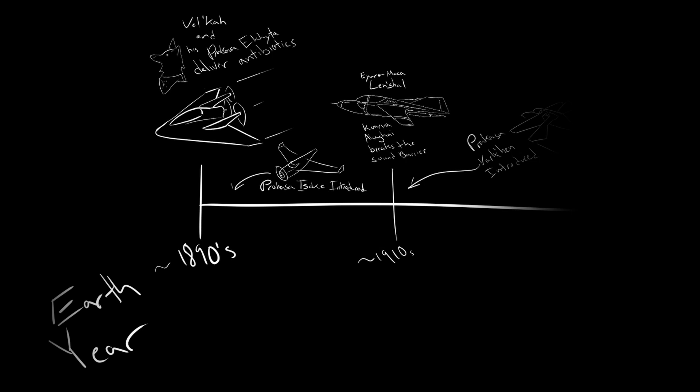Aside from school, Tenra had never made much of an effort to integrate me. I suppose he didn't feel it was his business, or maybe Mom had told him not to. Hell, maybe I told him not to. I don't remember. But for those first couple of years, it was like being raised back in the CCR, albeit by an awkward, bumbling alien parent, like the two of us were out of a Spielberg knockoff.

I didn't think much about him. Of course I didn't, I was 9. To me, he was a weird god trying to masquerade as the one I'd known. But something changed when I brought up the festival. I think I got to see the person Mom had liked so much. He cared for me until then, sort of like I was a very needy roommate who was scared of the dark. But it was then that he'd started to raise me. I think maybe it was the first time he felt he had something to offer.

You see, Uncle Tenra fell somewhere on the grand ethereal web that stretches between all of the galaxy's preeminent scientific luminaries and all of her bravest and most ingenious rednecks.

You wouldn't know it to look at him. He's bookish, and before me anyway, made a modest living working on high-pressure systems and space stations. Not glamorous work, but shockingly dangerous and sophisticated. He said it took him all over the settled galaxy, past the furthest reaches of the affiliate's borders. Said he'd worked, lived, and made friends everywhere from the glitzy commercial centers and Thika Zone rings to far-flung research stations where the only light comes from the ones you switch on.

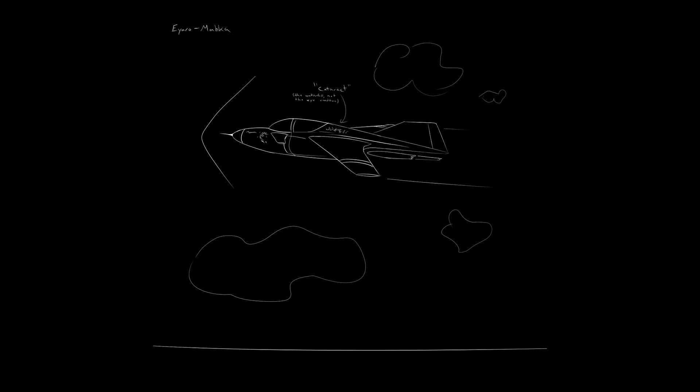Anyway, when fall came in my second year of school, I told Uncle Tenra that I wanted to try the Festival of Storms, and he lit up like someone dipped him in kerosene.

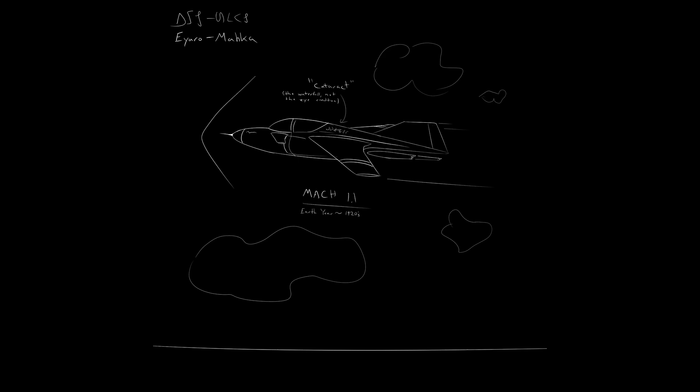It must have been late autumn when I asked about the festival, which I say because I came home from school to find the film of ice on the pond from that morning hadn't melted. Like always, Tenra was there to greet me with a bark and a mug of a sort of sweet beetroot mash that I was fond of.

Needy roommate or not, we had a rhythm. I felt safe with him. He knew what to say when I missed Mom, and I always liked the way he'd ask me about school. He had this casual bar-top parlance like we were equals.

Come to find out later that Laps are careful about each other's business, and it was only because of a book he'd read that Tenra had known to ask me at all. But the way he thought to do it meant a lot to me, and that day I answered very plainly, as children do: I wish we celebrated the Festival of Storms.

He looked confused. 'You do?' 'Santa can't get here anyway.' 'Who told you that?' 'Velky and I figured it. It doesn't make sense.'

I probably should have figured out Santa ages before then, but consider, I had a talking space fox for a foster father. Tenra shrugged. 'Your mom asked me to keep the Santa thing up until you asked, but there's more to it than him, isn't there?'

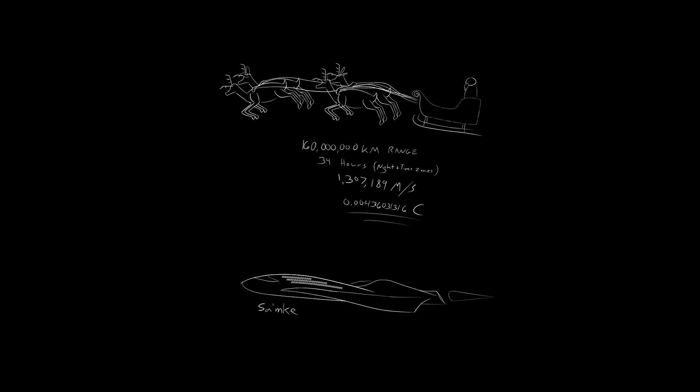'Is there?' I had some idea of who Jesus was, but I also had a point to make. His brow furrowed. 'Something about the belief your people were created and forgiven for something?' 'I don't know. It's a big deal, though.' It was my turn to shrug.

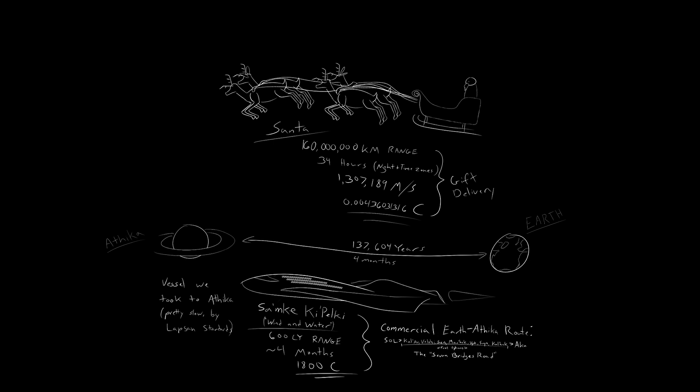'I don't know either.' He considered that for a moment, grooming his muzzle with a paw, and then he grinned. 'You're sure?' A steady twitch in his tail betrayed how badly he wanted me to say yes. Suffice to say, I had no idea what I was getting into.

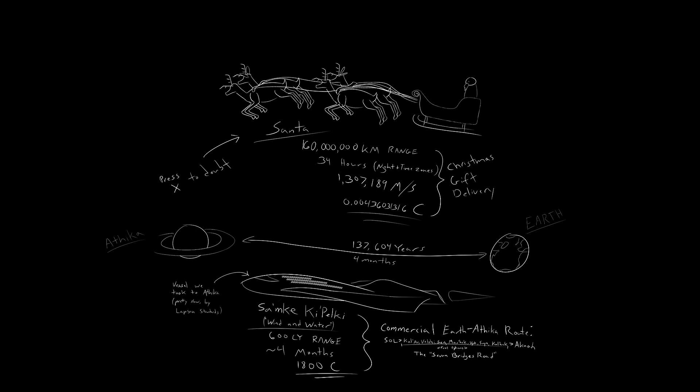You see, I thought the race was something you watched - purview only of the elite pilots and engineers who made household names of themselves. I thought the Festival of Storms that Tenra and I would celebrate would be the potluck thing. I thought that was what I wanted.

It made for a confusing ride to the airstrip, especially when this festival, as far as I knew, was still the better part of a month off.

Tenra called his machine Karaharshi, a word that meant the sound of your blood thrumming in your ears when your heart is pounding. I could neither write nor pronounce Karaharshi, and learning its meaning came to call it heartthrob. At the time I didn't know that term wasn't as literal as its Kinnery equivalent, but I've come to think it's suitable anyway. Sue me.

I introduced Karaharshi by its name because even now I struggle to find other words to describe it. If biblically accurate angels were a mess of eyes, wings, and whirling discs, then Karaharshi must have been a biblically accurate airplane. Even by Lapsan standards, it's tough to put it in clearer terms than that. I'll describe how it works, and you'll understand then, but for a quick simile, as a way to show you that thing my kid self saw, that's the best I can get you.

And if you'd been there, you'd understand why I believed in Santa for so long. If that flew, why not reindeer?

But the Karaharshi I met that year wasn't flying. Not yet. It loomed like an obelisk in the back corner of a tall but otherwise unassuming hangar on the northern end of the Karviken aerodrome. Its fuselage, then bare metal, shone gold in the amber of an old bulb that hung from the ceiling. The rotors cast long, twisted shadows, at least until Tenra snapped a switch on the floor and bright shop lights buzzed to life to banish them.

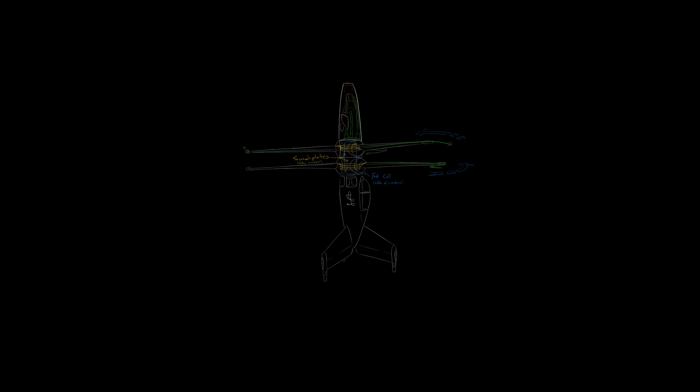Well, Karaharshi, aside from being the passion project over which an alien HVAC specialist bonded with his adopted human daughter, is the Pitts Special of thrustwings. Built for racing and aerobatics, it's a coaxial design driven by cold tip-jet nozzles mounted on the rotors and supplied by bleed air from a single central turbine, much like the rotodyne or jet gyrodyne concepts on Earth, or any other tip-jet helicopter that pleases you.

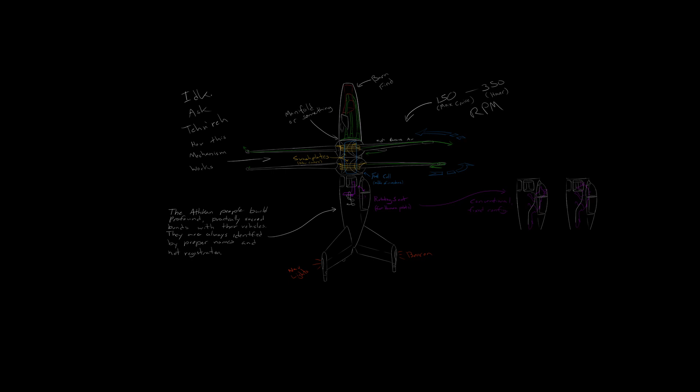It's fast, for a thrustwing anyway, and manages to have just enough range to be useful. But the headliner? Karaharshi is equipped with a cyclic. Having cyclic control, that is, control over the incidence of each blade individually while the rotor rotates, means two things. One, Karaharshi in VTOL mode isn't just a passively stable tailsitter, but a fully functional helicopter.

And two, it can do this. As a result, Karaharshi is, despite appearances, not only the most fun of my thrustwings and the most extreme in capability, but also the only one not to be a complete death trap. It's in fact so not a complete death trap that I think I could actually work up the courage to fly it if it existed.

But all of that begs a more fundamental question. What the hell is a thrustwing?

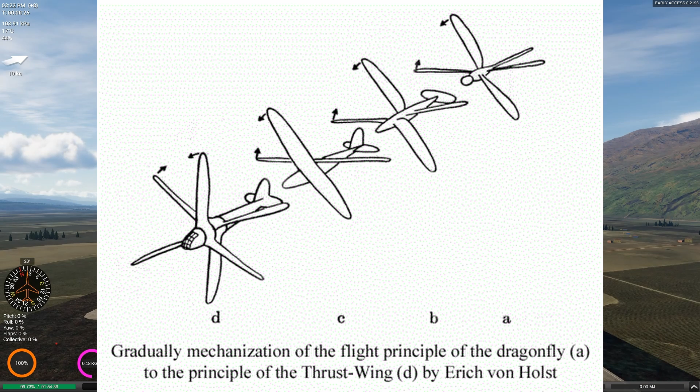Well, in the last video I did on the subject, I called them, quote, 'hybrid rotor aircraft,' not realizing that they kind of sort of have a proper name, coined by one Erich von Holst, a German physiologist who tinkered with ornithopters, and, at least on our planet, seems to be responsible for introducing the thrustwing concept sometime in 1940.

And in a way, thrustwings are a sort of ornithopter. As the name implies, they're aircraft that derive both their lift and their thrust from their main wings, just as birds, insects, or mechanical ornithopters in real life, Flyout, and even the funny worm movie do. The difference is, thrustwings accomplish this with more conventional axially rotating rotors rather than reciprocating wings. Effectively, they're helicopters, just with enough blade area to use their blades as a mix of wing and highly pitched propeller in forward flight. Why do this?

Couple of reasons. If it's 1940, the advantage is that you don't have the material science or jet technology to do VTOL the usual way, and this trick seems about as good as the rest of the wacky ideas for VTOL that people are coming up with. But if it isn't 1940, there are still some reasons.

And the first one is still VTOL. Sure, you could build something like a Harrier or an Osprey, but that means getting your propulsion system to give you a thrust-to-weight ratio of at least 1.0 and change, and that is not trivial. And after that, you also need a way of converting your vertically optimized propulsion into forward flight optimized propulsion, which probably also needs to be optimized for a much higher speed. And that is not trivial either.

Not that I would suggest thrustwings as a trivial alternative, they are absolutely not trivial, but depending on what you have to work with, I can see some value.

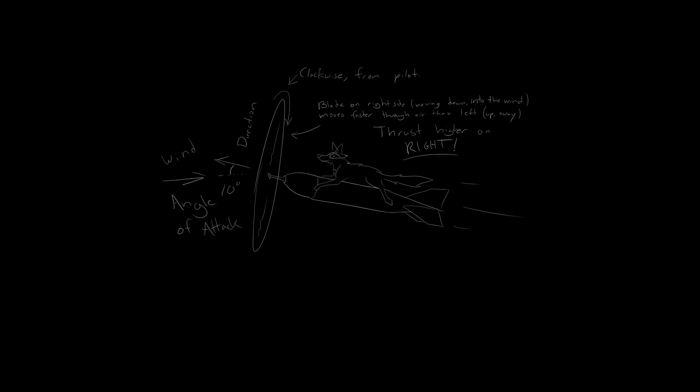After all, you can't have retreating blade stall if there is no retreating blade. That's even nominally true of the asymmetric lift problem, though the big asterisk on that is that it will only be true at angles of attack that are close to zero. Asymmetric thrust from propellers due to a blade that's moving overall more upwind than the other is absolutely a thing, and in fixed wing we call it P-factor. That is totally going to be involved, and we will be coming back to it later.

But for now, point is we've solved most of our rotorcraft problems by just pivoting our helicopter over until we use the rotor entirely for propulsion, and just like that, we have reinvented the tail sitter. Now, there's still that matter of torque versus RPM, but from there you can imagine what would happen if you just kept increasing the collective on that rotor.

Sure, you're kind of limited in the RPM department, but if you just keep increasing the blade pitch, the rotor can keep doing work on the air even at those low RPMs, and make as much use of the torque you have as possible. But we're not out of the woods yet.

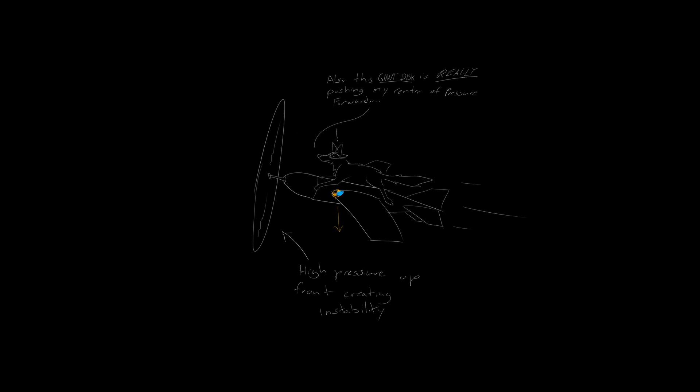Now that the rotor's busy facing forward all the time, we need some other way to support our aircraft, and that means wings. Adding wings means adding drag, and we've already got an awful lot of that from our rotor. Not that this sort of arrangement can't be made to work.

The XFY-1 Pogo is a clear example of it in real life. But what if you could arrange to use the blades themselves for lift instead? There are drag and weight advantages there if you can get away with it. As with ornithopters, if your source of lift is also your source of thrust, then you don't have to waste any additional drag on adding one or the other. And in theory, we can have a pretty big rotor without it becoming a burden in forward flight.

And now we arrive at the centrally driven thrust wing, a concept resembling Holst's early models. Unfortunately, as much as I would love to experiment with centrally driven designs, Flyout just doesn't offer us a good way of doing it. We can't drive these passive spindles with engines.

But on the flip side, tipjet designs have advantages all their own. The obvious one, of course, is that they have no express need for an anti-torque mechanism or coaxial rotor. But there's another, and that is that they aren't committed to making the same RPM for torque exchange that a helicopter or centrally driven thrust wing would.

This might be a little confusing since we're working with jet nozzles and not a drive gear like on a helicopter, but our tipjet thrust wing trades the linear speed of its jet nozzles for torque much the same way a small drive gear trades RPM for torque.

Our rotors produce incredible static thrust, but like the lower gear in a car, that thrust falls off very quickly as we speed up. We can help with that by increasing the pitch of the rotor as we discussed, but tipjet thrust wings offer a further optimization. Our tipjets produce relatively little thrust overall, but that thrust that they do produce falls off far less quickly with speed than our rotors.

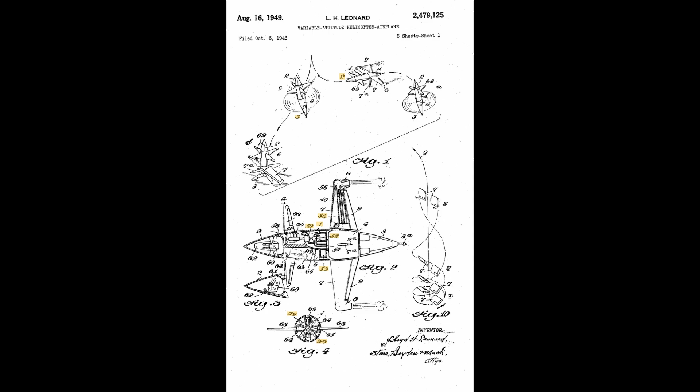A Lloyd H. Leonard. I just discovered this guy's patents courtesy of another Flyout friend and a forum post on the Secret Projects forum from like 2005. I have never seen this stuff before, but I am so glad to have found it. It should be keeping me pretty busy in the Flyout department for the foreseeable future.

Who is Lloyd H. Leonard? Is he in any way credible? Who knows? The patents are fanciful, to say the least, but I like my aerospace spicy. And it's not like it's any more fanciful than the German versions.

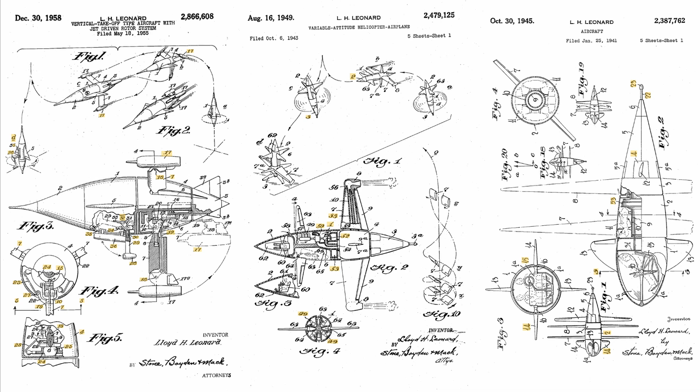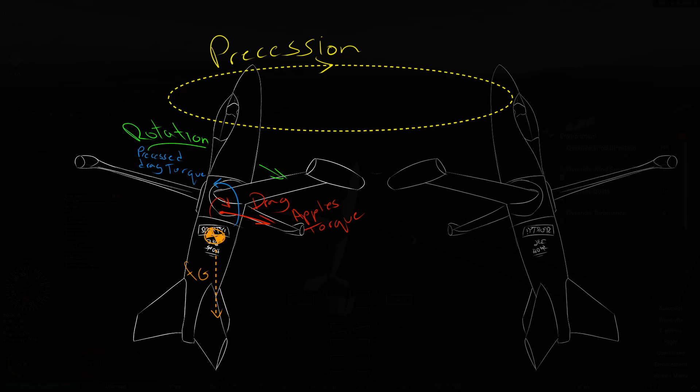But through all that, there's one thing that really stands out to me about Leonard's thrustwing. It's a canard design. Later in this video, I get really deep into the nitty-gritty of what makes thrustwings stable in vertical flight, as I now have a pretty solid theory as to why. For now, the short version is that the tailplanes are very important. But while I'm making that argument, I come to the conclusion that canards might be even better, due to the unique way that thrustwings precess.

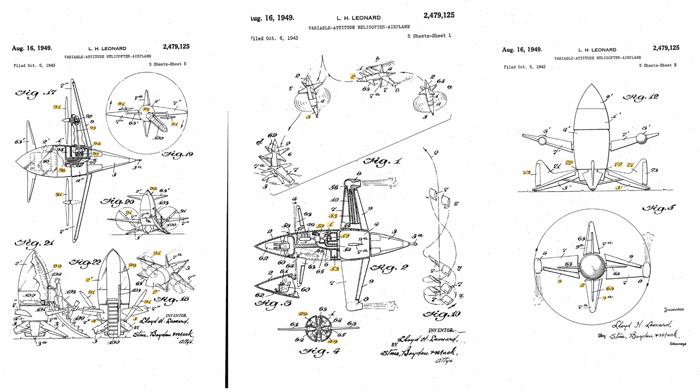I really wish I could speak with more authority on who Leonard was and where he might have gotten this information from. The designs, while fanciful, do show familiarity with aircraft. But as close as I can tell, filing patents for crazy designs seems to have been kind of a hobby for him - perhaps the closest one could get to Flyout in 1943, if not possessed of the resources to build your wacky designs for real. Other than the patents themselves and a few candidates for what might be his obituary - it's not a common name, but not uncommon either - that's all there seems to be on the internet when it comes to him.

More on this theory of mine in about a half hour. Sorry for the interjection, but there's a lot to cover here.

Somewhere out there is probably a model airplane builder who's got bit by the same bug that I was, so I wouldn't be surprised to learn that there were flying examples at the model scale. That said, I haven't found them myself. I am considering busting out my old Spektrum transmitter and taking a stab at it, though.

Thrustwings, as I mentioned in the last video on the subject and will yet be harping on in this one, have some really odd stability behavior - or at least Flyout seems to think that they do. I'm very curious to find out whether the predictions Flyout is making are realistic, because so far all of my attempts to understand and optimize for them have been based on the assumption that they have some basis in reality. If they don't, then solving the problem of thrustwings in Flyout abruptly stops being a matter of aerospace engineering and becomes a problem of software engineering - sort of like the aerodynamic equivalent of speedrunning Mario 64. Now, I find that stuff fun in its own right, but it's largely not what I come to Flyout for.

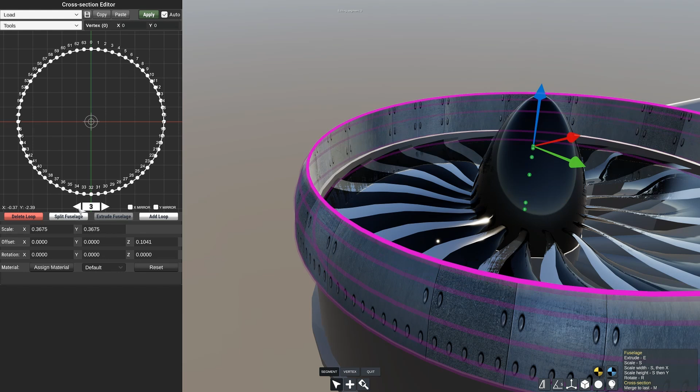Now, you could get around this limitation by constructing your wing from a multitude of smaller wings, but we would prefer to avoid that. The reason is, using multiple small wings will interfere with the span simulation that Flyout natively supports. As far as Flyout is concerned, your blades would then be many very small wings with very low aspect ratio, instead of one long wing with a relatively high aspect ratio, and that will result in an induced drag calculation that is higher than it should be.

Aside from that, for all its strengths, Flyout is still a simulator. It has to run the numbers on these wings on your computer, and it only has a certain number of frames to get that done. It's pretty good at that, but the more we complicate our rotor, the less reliable the whole assembly will be. I prefer to keep things simple. Thrust wings are tough enough to get flying as is.

But coming back to twist, the speed of the blade tip is, of course, for a given RPM, a function of the blade length. And that means that the longer our wing, the bigger the difference in speed from root to tip will be, and the more twist we will need to produce thrust evenly. That means the longer our blades, the less we'll be able to twist them as much as we should, and the worse they'll perform. Not only will they produce thrust less efficiently and be less resistant to stalling, but they also tend to be less stable overall.

Because of this limitation, for most sizes of thrust wing, you are going to want as much wing twist as possible. That's what I do here: -10 to +10, remembering to rotate the blade again to compensate so that the leading edge of the root is still facing straight down the length of the aircraft, while the blade is in its default, fully feathered position.

When you're happy with your blade, mount whatever you intend to use for thrust to the blade tip. You will want this source of thrust to line up with the leading edge at the tip of the wing, so it will be 10 degrees offset from the wing rotation, and thus 20 degrees offset from the wing root.

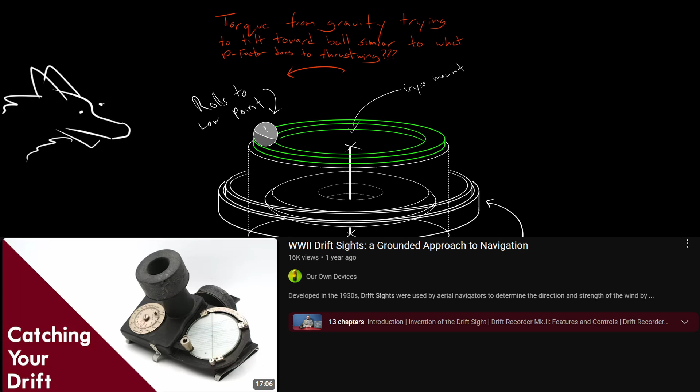If you want the background, watch this excellent video by Our Own Devices, which is probably my favorite channel on YouTube right now. But the short version, let's not worry about what a B-3 drift sight is or does.

The important part is that it has a gyroscope in it, and that gyro always points towards the ground, even if disturbed. It accomplishes this with a little metal ball set in a run on top of the gyro housing. This ball rolls to the low point of the gyro's current orientation under gravity, and gravity acting on the ball applies a torque to the gyro. That torque is then precessed by the rotation of the gyro, and somehow this process results in the gyroscope slowly spiraling to upright.

Our thrust wing seems to also slowly spiral to upright, and it seems to do it because of a constant torque from p-factor that doesn't care about the rotor's current orientation. Could it be the same thing?

To answer that question, we would need to understand how the B-3 mechanism worked. And I have no idea. I don't know, my friend doesn't know. Trying to research the thing, you'd swear that style of erecting mechanism was some kind of secret alien technology not meant for public knowledge.

We've clearly been using it in production since the 40s, but the only traces I've found of it existing are: A, the gyroscope theory and applications by James B. Scarborough, 1958; B, two patents in the US from the mid-70s; and C, an archived article from the U.S. Naval Institute magazine by one Ensign R.E. Gilmore, U.S. Navy, 1912. None of these sources describe how the device works.

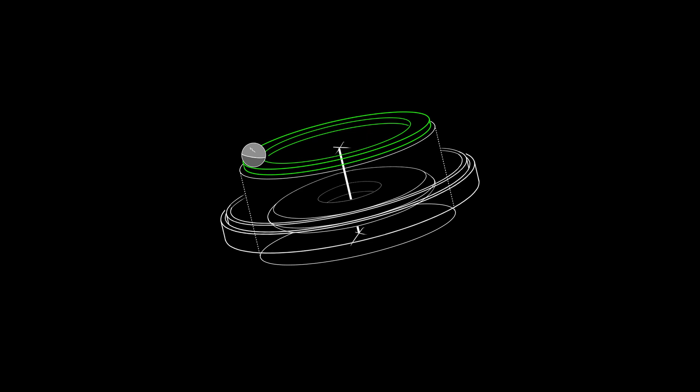Just to defend that conclusion a little: it wouldn't be enough for the device to just tip towards the ball and precess. It should precess infinitely in that case. The force of gravity on the ball would just turn 90 degrees, end of story. The ball must sit slightly ahead or slightly behind that low point if it wants to apply any force perpendicular to precession.

So maybe it sits behind? In the B3 mechanism, there's this little friction arm that seems to retain the ball. So maybe it holds the ball behind the low point, and that's where we get the force. But no, it can't be. The direction of that force, when precessed, would be wrong. It would face away from the device, not toward the center.

The only way it could make sense, at least as far as we could figure, is if the friction arm held the ball ahead of the low point rather than holding it a little behind. But friction and gravity alone couldn't explain why the ball would stay ahead of the precession. We figure that's what's happening, but there must be something extra going on with that little friction arm that we can't see.

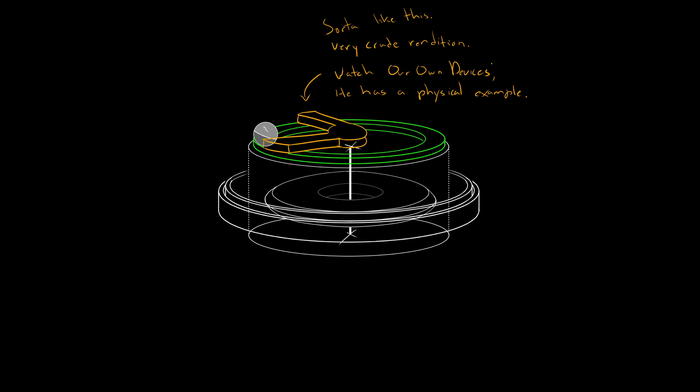I found it. After all this time, I found it. It was hiding in another patent. March 3rd, 1970, filed by the Whittaker Corporation in 1966. Patent US 3498146 alpha.

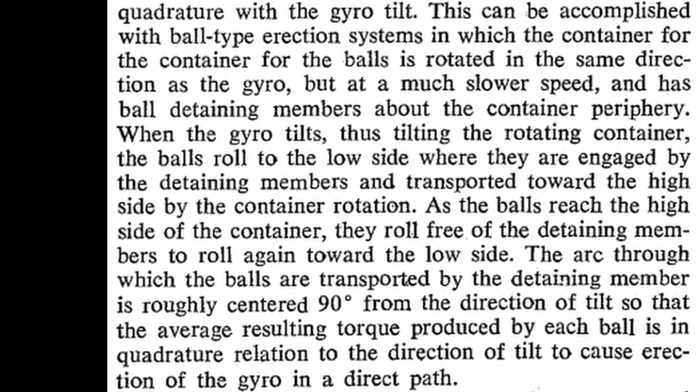Quote: this can be accomplished with ball-type erection systems in which the container for the balls is rotated in the same direction as the gyro, but at a much slower speed, and has ball-detaining members about the container periphery. When the gyro tilts, thus tilting the rotating container, the balls roll to the low side where they are engaged by the detaining members and transported toward the high side by the container rotation. As the balls reach the high side of the container, they roll free from the detaining members and roll again towards the low side. The arc through which the balls are transported by the detaining member is roughly centered 90 degrees from the direction of tilt, so that the average resulting torque produced by each ball is in quadrature relation to the direction of tilt, to cause the erection of the gyro in a direct path.

Wow, that actually genuinely makes sense. I have been looking for this information for months. This isn't exactly what's going on with the B3, since the B3 has only one ball and one apparent detaining member, but it seems to be entirely the same process, so I am satisfied.

Okay, cool, we understand. So then the question is: is thrust wing stability related to this behavior?

If you squint. To summarize my understanding of this system, let's assume our gyroscope is turning clockwise and rotated, say, 20 degrees to the left. The balls will roll to the left side and be engaged by teeth on the outside of the drum, then dragged forward and lifted up in a clockwise motion until they roll free again. Accelerating the balls that way creates a torque that attempts to rotate the whole assembly forward, but precession from the gyroscope causes the force to be applied to the right instead, which is the direction we need to go. So how does that compare with P-factor?

Let's assume our thrust wing's rotor is also turning clockwise and the aircraft is also tilted about 20 degrees to the left. Now the rotor in the dorsal position is experiencing more airspeed than the one in the ventral position, and producing more lift as a result. This would ordinarily torque us forward in pitch, but instead the force is precessed, and it torques us back to the right, which would in theory stabilize us.

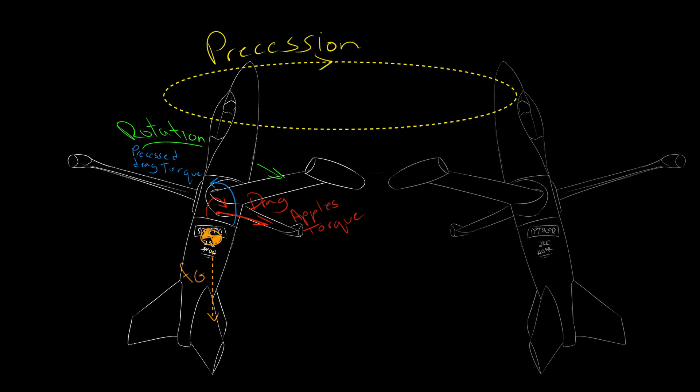Okay, cool. But now we have an even bigger question. If we need the hovering thrust wing to be dynamically unstable in order for it to become erect, why did removing the tailplanes hurt the stability rather than help? The difference is plain to see, but shouldn't adding the tailplanes push the center of pressure further back and make the aircraft more stable? And, yeah, good question.

I wish I had a better answer than I do. My guess is it has something to do with how far the center of pressure moves as the thrust wing slows down in vertical flight. The slower it gets, the less effective the tailplanes are, but the rotor remains unstalled because it's rotating, and provides pretty consistent pressure regardless of the thrust wing's speed.

Past that, in order for the whole stabilizing-like-a-top thing to happen, we need the drag somewhere with a lot of arm. I think that's what the tailplanes do for us, and why removing them ruined the effect. But if I'm right about all of that, are you thinking what I'm thinking? A canard pusher thrust wing should give us the best of both worlds.

Full disclosure, this is a very brief clip representing about 45 minutes of investigation. During that time, I tried doing a full canard pusher build like I was suggesting, pushing the rotor all the way to the back and relying on front-mounted canards for maneuvering. That is interesting from a hover stability perspective.

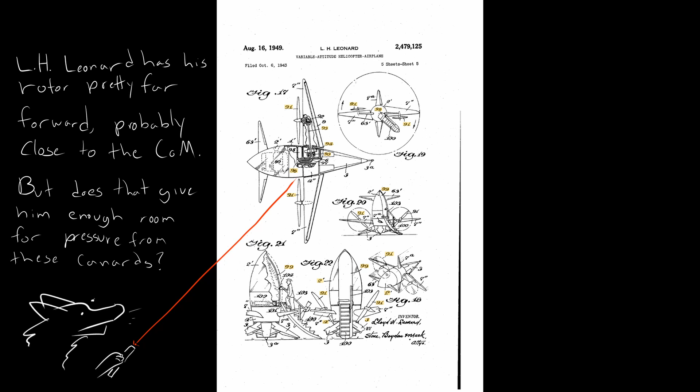It doesn't seem to always work, but there are some conditions where it works better. The big problem is it requires the rotor to be somewhat distant from the center of mass, because pushing the controls forward pushes the center of pressure forward. There is so much P-factor on the rotor that you really can't afford to have it very distant from the fulcrum, and that creates a ton of issues during pitchover. So if that can be made to work, it's not a problem for this video. So far, it definitely seems like thrust wings with a canard and tail are the path of least resistance.

Okay, canard interlude over. Back to what we were talking about. Oh right, the ring on the bottom of the test thrust wing, and the effect of center of gravity on the efficacy of the whole top-righting mechanism thing.

Back to that. This top-like righting effect was present on the thrust wing as originally designed, without the ring, and with the center of mass moved further aft, but it was only maybe half as strong, which made it a lot harder to demonstrate and differentiate from the other forces at work. But, of course, we've seen that this thrust wing, as designed, is stable even without the ring.

So what are those other forces at work? Clearly this top-like behavior is not the end-all be-all, and sure enough, it's not. Over the course of trying to determine where this mystical thrust-wing self-righting behavior comes from, I developed a whole raft of theories with help from a friend of mine. I'm quite confident there are two more forces at work besides the top thing: P-factor and rotor drag.

Rotor drag first. A few of you pointed out in the comments that the righting force might just come from the aircraft falling under the rotor, kind of like a parachute. During the first thrust-wing video, I dismissed that idea. I had discovered that my coaxial thrust-wing airliner wouldn't self-right the way the Triebflugel replica did, and the drag theory wouldn't care whether you had counter-rotating rotors or not. So I figured the righting force had to come from something that the counter-rotating rotors would eliminate.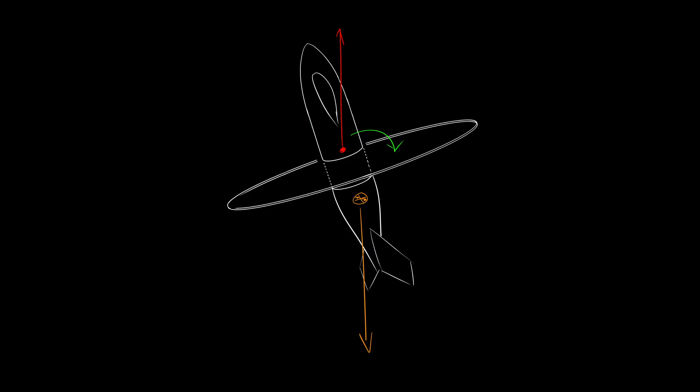And that is partially true. That's where the whole top thing comes in, as well as the third force we'll get to in a second. But I was wrong to dismiss drag entirely. It turns out the reason my coax airliner won't stabilize at all with both rotors going isn't just the lack of P-factor or precession. It's also that I happened to design the aircraft with an overall center of pressure that sits almost exactly on its fulcrum when the rotors are engaged at a shallow angle. This means the rotor drag has no way of applying torque to the aircraft.

I have since found, with a cyclicless version of Karaharshi, that it is possible for coaxial thrust wings to passively self-stabilize as long as they are, A, descending, and B, their center of mass is some distance behind their center of pressure when the rotors are in the descent configuration. Much like the top thing, this force turns out to be pretty weak overall, but it scales with both the distance between the center of mass and the center of pressure during descent, and the overall descent rate. For most designs, you want to be descending somewhere between 700 and 1200 feet per minute before you start to notice this taking a meaningful effect. That makes it tough to rely on, but with careful flying, it can be done.

And then Force 3, P-factor. Again, back from the dead. As it happens, I ended up covering it in pretty good detail in that cutaway, so I won't waste your time. Short version, in case you're clicking around.

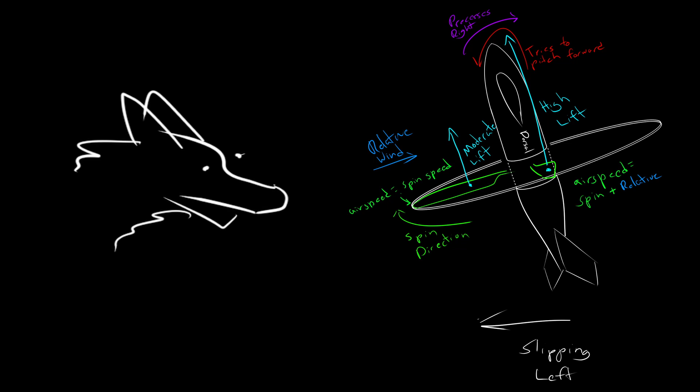I'm pretty sure all that's happening is this. The thrust wing rotates or translates in hover flight. This induces a side load on the rotor, which generates P-factor 90 degrees from the direction of the side load. Both P-factor and gyroscopic precession are phenomena that cause forces to appear 90 degrees off of where we might expect them, but they are not the same force, which means that P-factor is also subject to gyroscopic precession.

So as long as our angular momentum isn't too high, such that P-factor can't overcome the rotation resistance, there should be a sweet spot where our P-factor forces are precessed an additional 90 degrees by our gyroscopic forces. And the resulting force is opposite the direction of the disturbance, reducing it, hopefully.

But I just got done demonstrating quite plainly that thrust wings without tails don't self-stabilize. This behavior wouldn't require a tail, so why even include it? I think it's relevant in edge cases, namely the deceleration of the aircraft when it's in a vertical orientation and translating horizontally. Can I prove that? Not really. This is some stick and rudder, Jonathan Livingston Seagull intuition.

My reasons are thus. From a physics perspective, I can't imagine any way for it not to happen. P-factor happens, gyroscopic precession happens, therefore gyroscopic precession happens to P-factor. It's unavoidable. And when hand flying, in certain situations I think I can feel it and see it in the lift vectors, but it's tough to pin down. But if that's the case, why is it so subtle?

P-factor is clearly an enormous torque, which is very evident if you ever screw up a pitch-over maneuver. And when you do, it doesn't really seem like the torque is getting precessed much. If you pick up too much alpha, you're going to get tugged to the side, no doubt about it. Well, you combine two rotations by adding their angular momentum vectors. P-factor is applying an absolutely monumental amount of torque, and our rotor just doesn't have that much angular momentum.

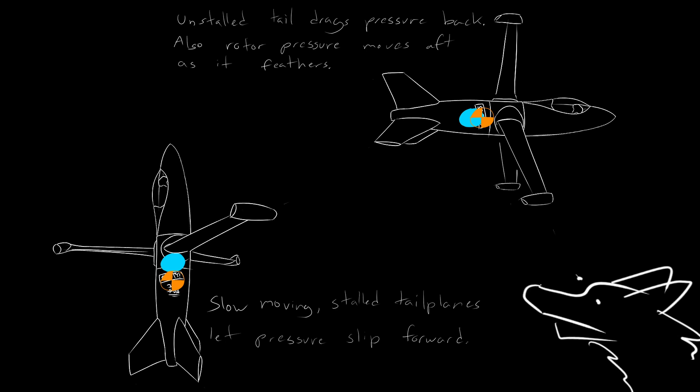And that's it. Doesn't seem like a whole lot in retrospect, but after months of building these things blind, guessing, checking, and checking again, I am thrilled to finally feel like I have some idea of what's going on. Knowing what I know now, or at least think I know now, it will be very interesting to see where my designs progress from here.

As much fun as cyclic coax designs like Karaharshi are, I definitely want to try iterating on passive thrust wings with this new insight. I've got some ideas to that end, and I, for one, think Lloyd H. Leonard deserves hearing out.

Okay, last thing. This time to quote Bullwinkle, 'This time for sure.' All of this passive stability gyroscope mumbo-jumbo is well and good, but I promised you a guide on how to build a cyclic like the one in Karaharshi.

I'm afraid I won't be taking you on a discovery journey for this one. We'd have to go all the way back to Garry's Mod in the halcyon days of the late 2000s. Once Vans shoes were popular, people still went to the mall, and my C-in-middle-school-algebra ass was trying to figure out how to use sine and cosine to control a rotor like my cooler Garry's Mod friends.

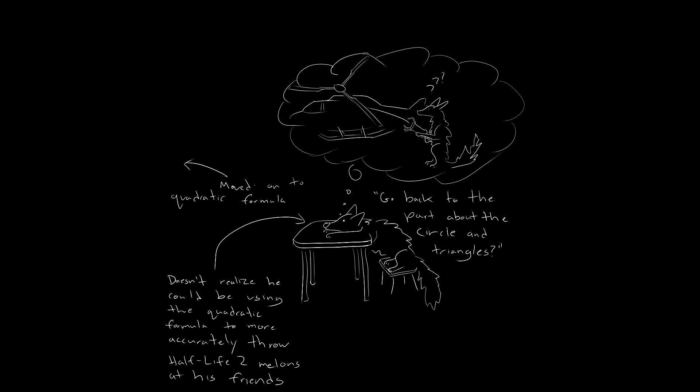I have been doing virtual cyclics like this for absolute ages. In fact, they were some of the first code I ever wrote. But in case you haven't, the good news is it's really easy. You can figure this out even if you've never studied trig before, I promise.

Fair warning though, this is not exactly a Lua or LAMP tutorial. I'll show you some examples, but when it comes to the code itself, there are more comprehensive and probably more up-to-date resources than myself. Besides, this video is already way too long. We are not getting into syntax.

To build a cyclic out of math, we first have to know what a cyclic is, so how do helicopters fly anyway? This is pretty common knowledge in sim circles, so I won't belabor it. The short version is that a cyclic is a control in a helicopter that alters the angle of each blade individually as they move around the rotor disc, thereby shifting where the lift is concentrated and controlling the attitude of the helicopter. The common way to do this is with a swash plate, a non-rotating part of the rotor mechanism that can pivot forward, back, left, and right and translate up and down.

This plate supports a second, rotating plate that is connected to the leading edge of each blade in the rotor head. The lower plate is static relative to the helicopter, the upper plate is static relative to the rotor.

Now let's imagine the pilot pitches forward. The front of the swash plate descends, and it drags the rotor blade in the forward position down with it, giving it negative incidence. Now, imagine the pilot keeps pitching forward, but the rotor rotates some. The forward blade is now over here, above the part of the swash plate that's not as far down, so the blade isn't as far down either, and now it has less negative incidence.

This other blade, meanwhile, has moved toward the forward position and has more negative incidence. The blade back here, on the opposite side of the swash plate, has positive incidence. You see how this mechanism creates areas of low incidence and high incidence in the rotor no matter which blades are on which regions? That's the key.